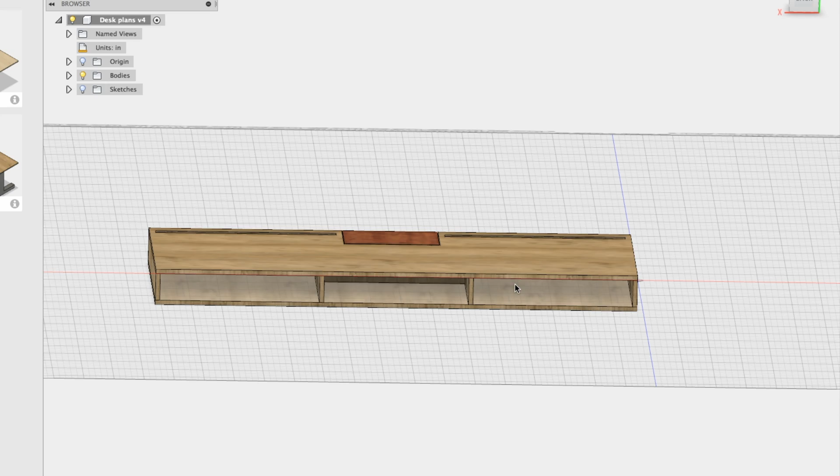So I had a few different ideas of how to make this desk, different designs, and so this is my first design here where you'd have basically two layers with storage in the middle, and I had this little door right here, which you could open up, and inside there would be a cubby for like power, USB, whatever I wanted. And these cubbies didn't quite go all the way back, so you'd be able to put your wires back through there as well.

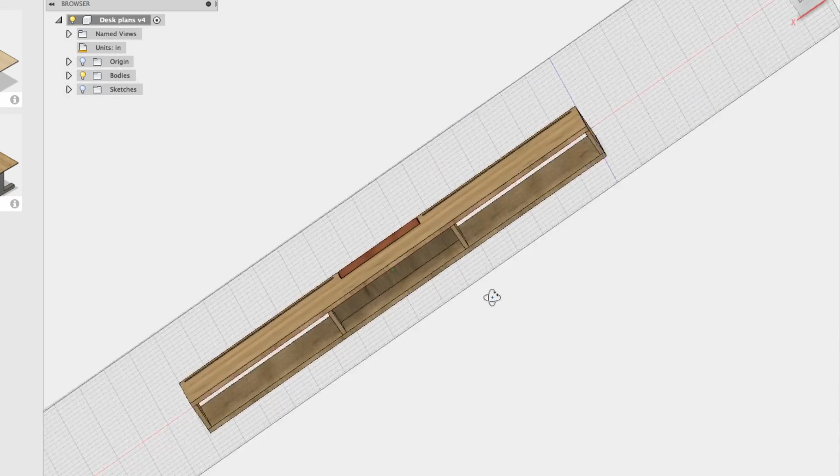I ended up not doing this design. This is just too tall, too thick between the cubbies and the top and the bottom of the desk. So that's the basic reason that I scrapped this design. And so I went for design number 2.

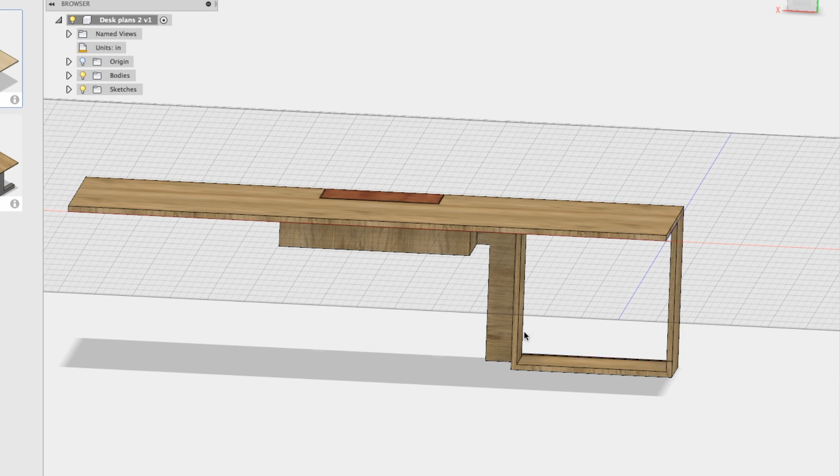So design number 2, I still had the little cubby thing here, and I started designing out where I wanted to hang the computer. So the computer is hanging at the back right here, and I still had the little cubby here for putting all the wires and everything in there. And then I had a little area here that you could route wires from where the computer sits, and the back would be here and comes up and over. And I just wanted to play around with a few more ideas to see what I wanted.

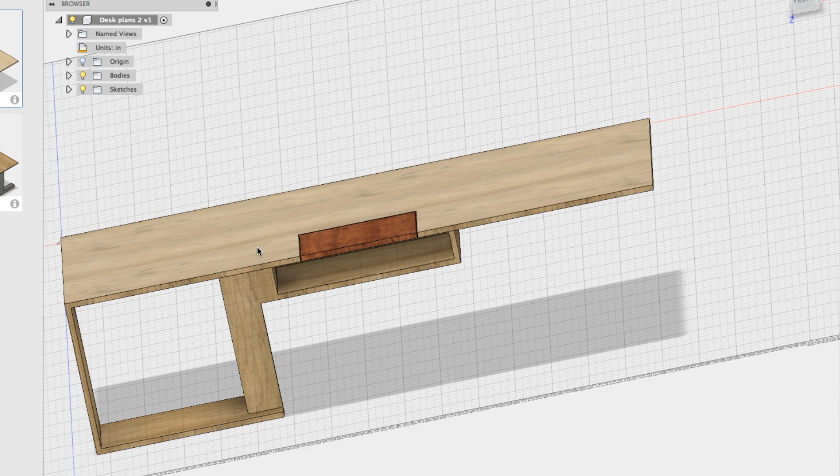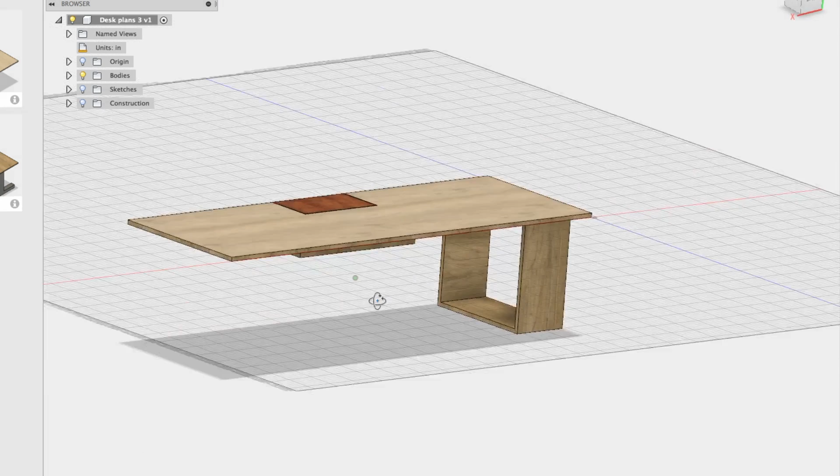So I came up with design number 3, which was making the computer go the other way. Instead of back and forth on the back side, it's back and forth on the side. So that was that design. I still had the little cubby for all the cutouts and everything, but I didn't really like this design too much. One of the problems is that the legs that eventually will go onto the desk here will be in the way of this guy.

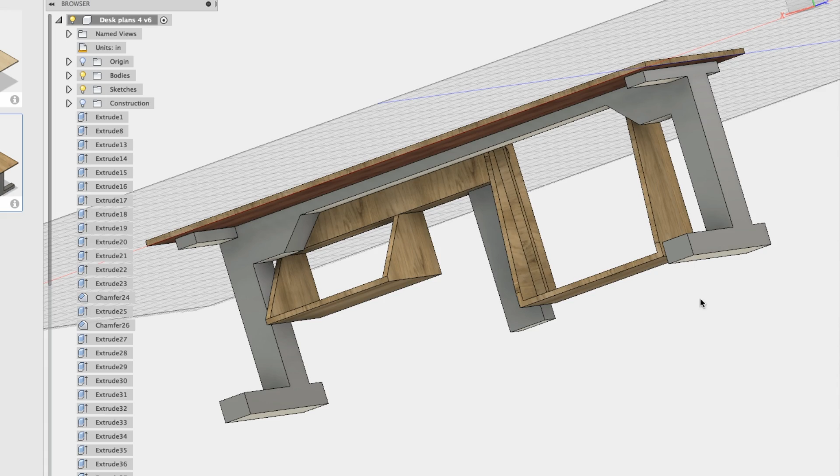Okay, so this was my last plan, and this is the one I'm currently going with. So I modeled in the legs at this point, so I'd be able to accurately put where everything's going to go. And I kept with the second plan's idea of having the computer at the very back. And the main reason for that is just so we have better routing options to go up through here. So I have a little hole here which will go into this cubby area here, and then I could put a power strip or whatever in this area.

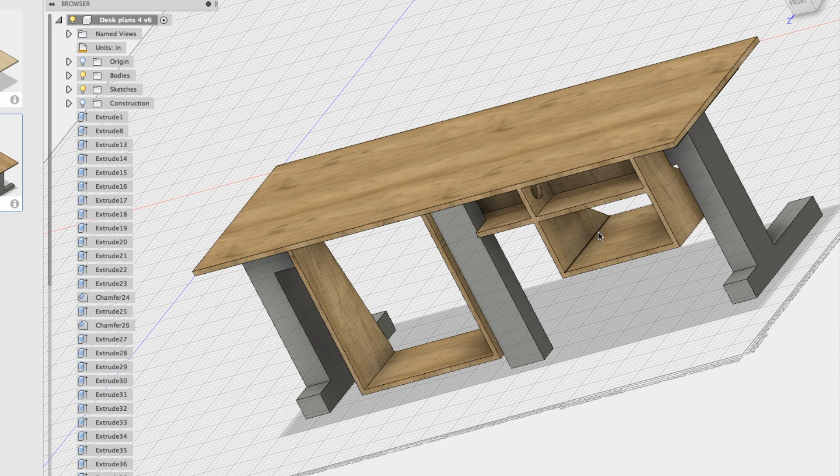And then I have another place here to put more wires and cable management, whatever. And I had added this new little hanger here. This hanger is actually for my stereo receiver that I'm going to be using for my computer. So this is the design I've been going for right now. In its current state, I only have the top and the legs attached. And I'm currently working out all the details for the hangers and wire management and stuff.

I started out with the top, and I was using 2x4 framing lumber from your local big box store. And one of the things about framing lumber here in the United States is that they make all the corners rounded. And so first I would go and I'd cut off the rounded ends, and then I would make this about 1.5 by 1.5 inches and about 80 inches long, which is just shy of 7 feet. And so I had to cut out about 20 of these, and that would make up the majority of the desk. As you can imagine, cutting this much wood made a lot of sawdust. Once all the pieces were cut out, it was time to glue them all up.

And so I put a bunch of wax paper all over the top of my table saw, which is where I'd be gluing these guys up. And I only did a couple at a time gluing up because I didn't have any bar clamps, which I really should have in this project. It would have made it a lot easier, as you'll see later in this video, all the cleanup I had to do. So I would just go and flip them all on their sides and put glue on one side of everything and put them all together and then clamp them.

I also had some wood pieces that were below and above. The idea was to make it so that these pieces would be clamped as well, and I'd be able to align them. It didn't really work out as well as I hoped. Once everything was all glued together, nothing was perfectly flat, and so I decided to use a belt sander to try to grind down as fast as I could to make it nice and smooth. And when that was taking a while, I decided, okay, let's try a hand plane. And that was taking a while as well. So after much frustration and lots of time wasted, I decided to come up with a new solution.